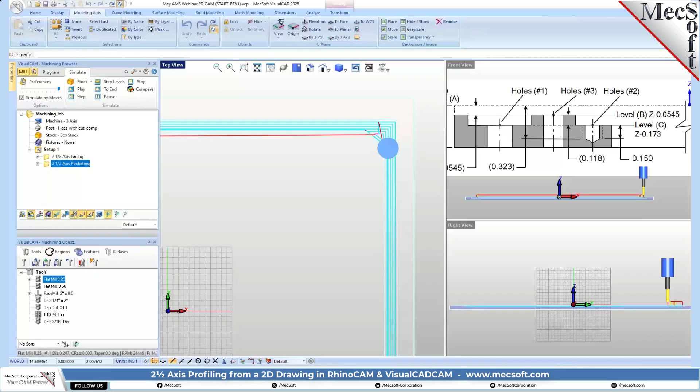Okay, so the next operation type we're going to do is profiling. Let's go back to the program tab and go to profiling.

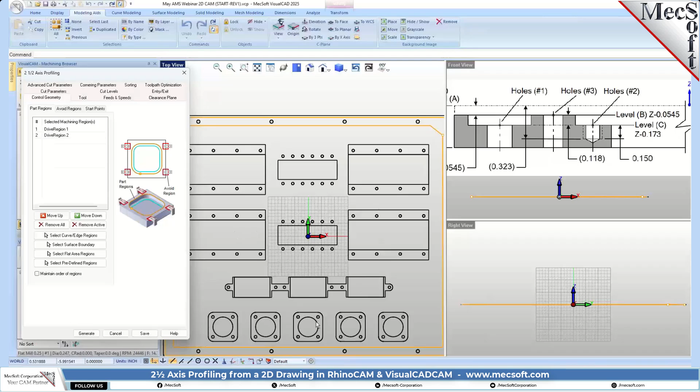On this part, we're going to profile the outer edge, so we're going to cut it out of the stock completely. This part actually has a number of holes in it. These areas here are actually pockets that cut all the way through the part, so you've got pockets all over this panel.

Let's remove all of our geometry. For the geometry, we want to pick the select curve edge regions. We're going to pick the outer edge, so we're going to profile on the outside of that edge.

We're also going to profile all of these because these cut all the way through the part. We're going to select that one, we're going to select this one. So we have two curve regions on this drawing: we've got an inner pocket and an outer edge.

So we're going to use the pocket. We're going to use this pocket, this pocket, this pocket, and there's another pocket down here.

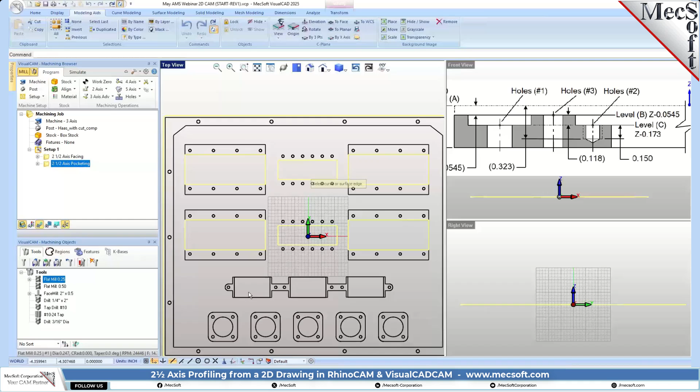That's not the one I want. If you want to get rid of one, just press the control key and pick it again, and it'll get rid of it. Okay, so what I wanted to pick was this outer one. Oh, no, actually I was right the first time. Let me get rid of that. The control key will unselect, so you don't have to reselect everything you picked.

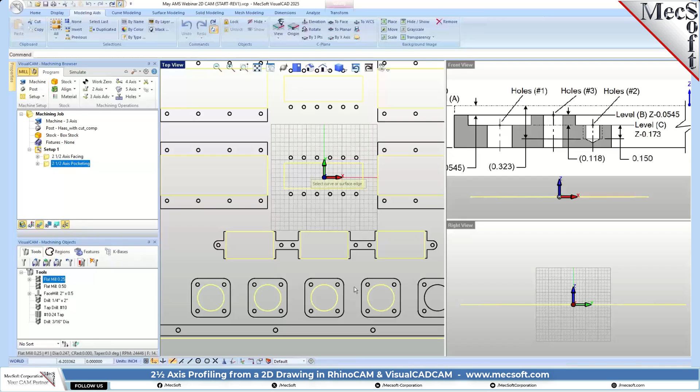So these inner squares are actually the cutouts. I'm going to select those. And then these down here are cutouts too. So these are going to cut all the way from the top of our part that we already have machined down, all the way down to the bottom.

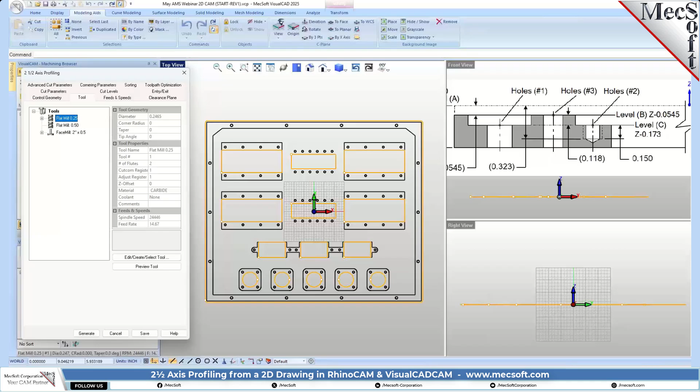Okay, just going to right click there. So there is our region that we're going to use to contain the profiling operation. For the tool, we're going to use the half inch flat mill. Feeds and speeds, clearance, we're not going to talk about that.

Cut parameters, we're going to use a tolerance of 1/1000. We're not going to leave any stock. For this profiling operation, we're going to do a roughing and a finishing at the same operation, and I'll show you how to do that.

And we're going to do a mixed cut direction. We're going to use the midpoint of the largest side for the profiling, which is fine. We're also going to specify the cutting side. We're going to do the right side, which happens to be the outside. Or you can use inside outside, but we'll just leave it set to that.

And then we're going to use this checkbox for determine using nesting. The reason we're going to do that is that the pockets or profiles we want to cut are nested—you have one profile on the outside, and other profiles on the inside. So it's going to figure out which side to cut automatically.

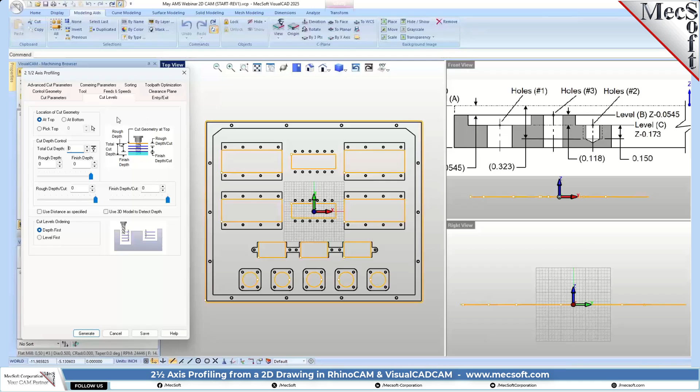So again, where do we want to start the cut? Well, we have the part already machined down to 0.0545. So obviously, if we want to machine from there all the way down, this pick top option needs to be 0.0545—that's where the cut's going to start. And then for the total cut depth, let's see if we've got it on here, our total cut depth.

Okay, we don't have it dimensioned, but you can refer to it by just adding 2 of these dimensions, like we're going to add the 0.118, okay? Or take the 3/8 and subtract the 0.0545, okay? And that comes out to 0.3205.

So we're going to do 0.3205. That's going to be the total cut depth of the profiling operation, and it's going to go all the way down to the bottom of the stock. Okay.

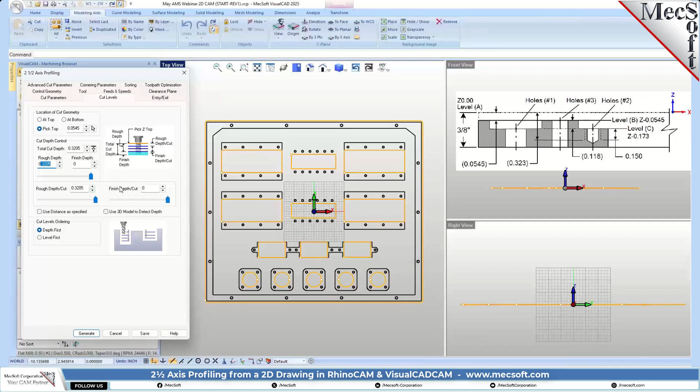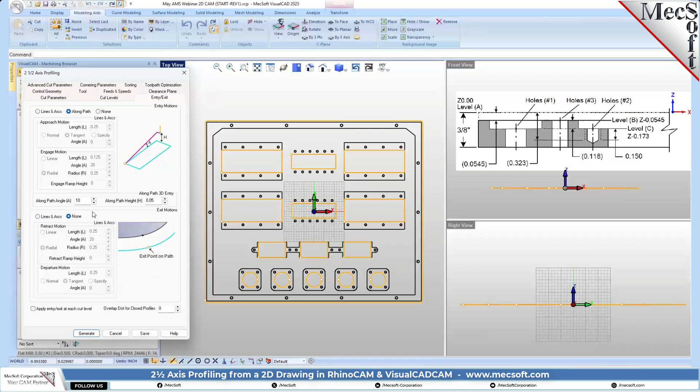And let's go ahead and let's do this at a couple of cut levels, since we are cutting almost 3/8 of an inch. Entry and exit, we can go ahead and use a ramp entry, do along path, and we'll just retract straight up. Okay, let's go ahead and generate that.

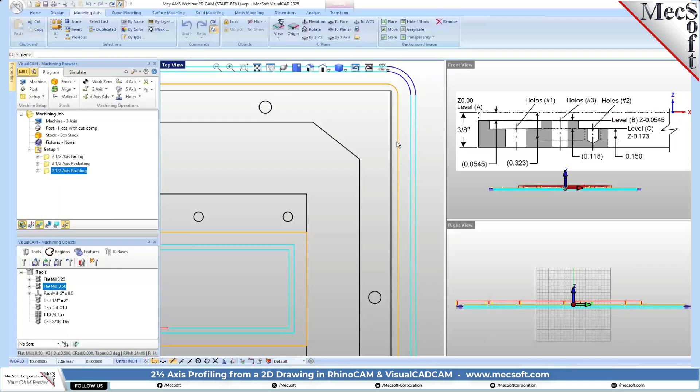Okay, so we've got a profiling operation. We've got 2 passes. The outer pass, you can consider that as a roughing pass. The inner pass with the stock set to 0, that means it'll be a finish pass right on the curve. Okay, the same with on the inside.

It automatically calculated this was the outside, this is the inside. Okay, and it automatically figured out the side to cut. So it's going to have 2 passes, 1 roughing and 1 finishing for all of these holes. And here we got arc motions here.

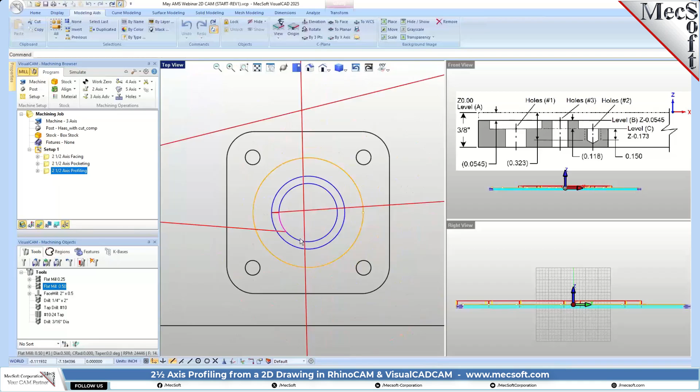Okay, and then if you look at our elevation view, we're cutting down. This is the top of the stock. Remember, this is our drawing. Okay, even though that's where our geometry is that we selected, that's not the top of the cut.

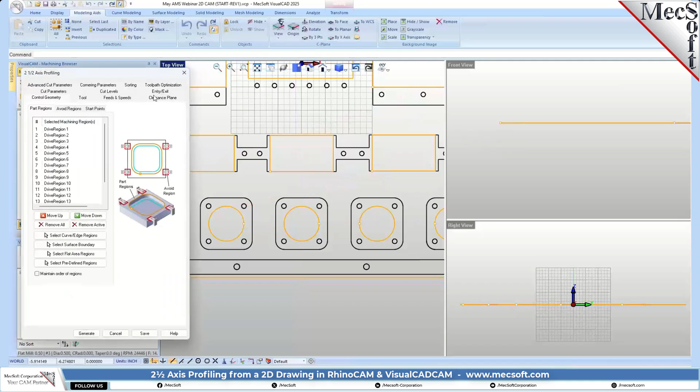But because we defined the top to be... cut levels, where are you? We defined the top of the cut to be at minus 0.0545. That should be a minus. Okay, regenerate that. Okay, this looks a little bit better.

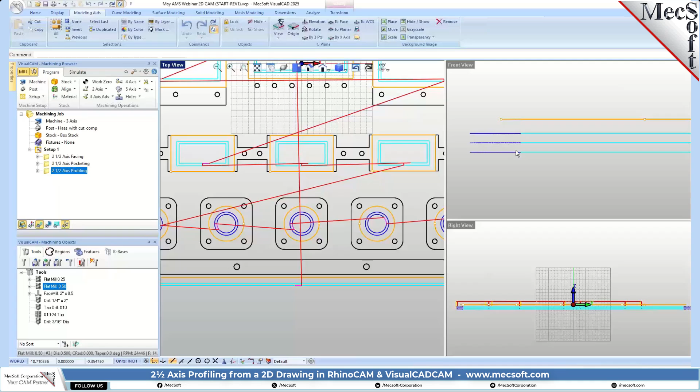So here's the top of the stock. That's where our drawing is. We've already cut down 0.118. So we're going to go down further 3 cut levels to get to the bottom. Okay, so let's go ahead and simulate that.

Okay. So what we've done here is we've actually profiled the outer edge. Okay, and these there's some inner edges here. Okay, let's go ahead and look at this.

Just a quick note there, Don, on the cut levels. Some people get confused that the cut depth is actually absolute value, but in our system, the cut depth is actually the coordinate value, so with respect to your 0. That's why Don had to specify a negative value, which means you're cutting below the 0. Right, so that's an important distinction that we have to make.

This point that we want to start cutting is below where our setup coordinate is, which is at the top of the stock. If you remember, we created... actually we didn't create a work 0. You don't have to have a work 0, but by default it's at the top of your stock. And we entered a negative number, which brought it down to this point right here.

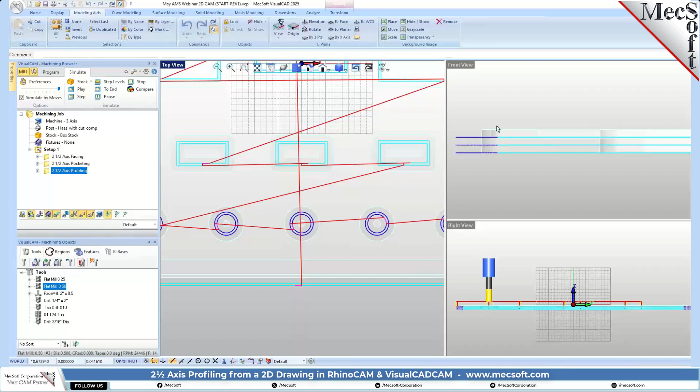Okay, and then our cut depths went from this level on down. We used 3 cut levels. Okay, so we have, let's turn this off.

So for our drawing, just to go over real quick, we faced it off down to the top of the part. We did a pocket, which is this area right here. You can see it a little bit. This is the pocket on the outer edge. And then we did some through holes, which go all the way through.

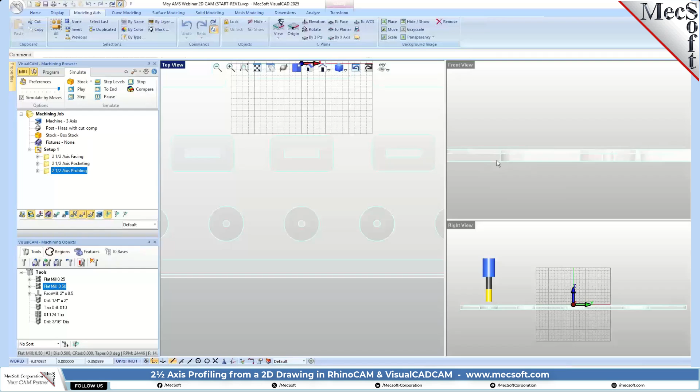This is some of the edges here. I know it looks a little complicated, but you probably get the idea if you look at this profile, this section view here. Okay, so let's go back over here.

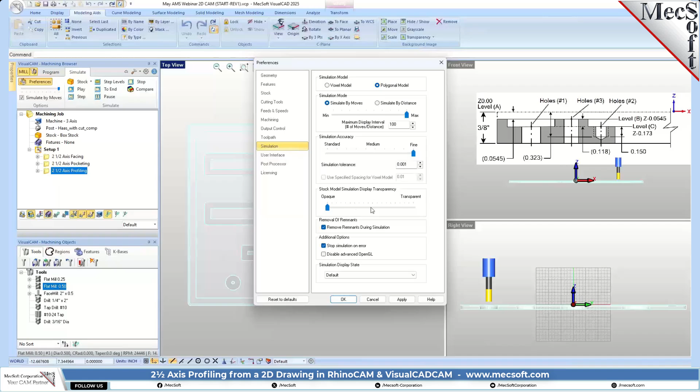And another thing I want to show you is that when we simulate this, let's play this again. I want to go into my preferences and I want to do the simulation. I want to do it from semi-transparent for now. I'm going to do it opaque so we can see the stock a lot better. Okay, and let's just go up here.